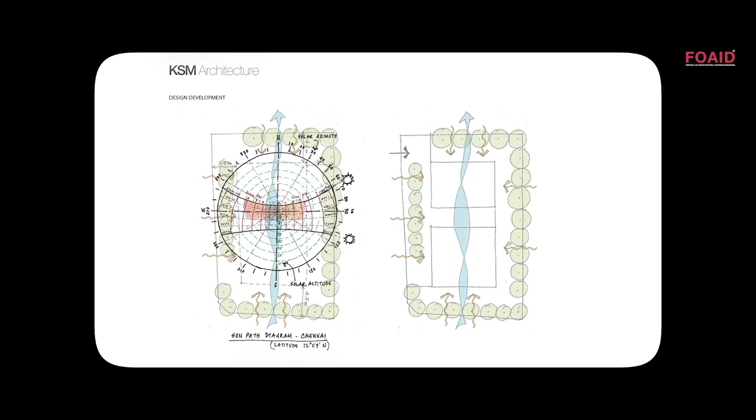And then, now we know broadly what the challenges are. So then we start working on sections, saying, what are we doing with the actual profile? What is the experience going to be like? Because in pursuit of environment, we shouldn't lose out the quality of space, the quality of environment that we're really talking about. So we start working out the section, which is the most important part of any architectural design. I'm sure you'll all agree that plan is there, but section is really where all the fun lies.

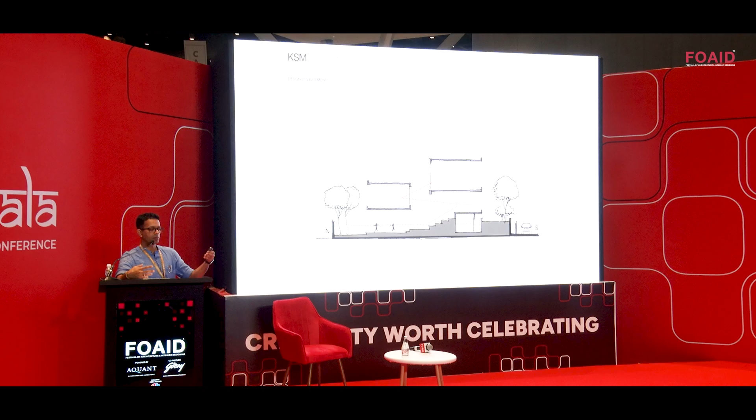So we talk about, are we creating public spaces for students at a lower level? Are we able to stagger the section a little bit? Can we play around with levels? Can we allow that breeze to flow through the space and create an environment where I don't really need air conditioning?

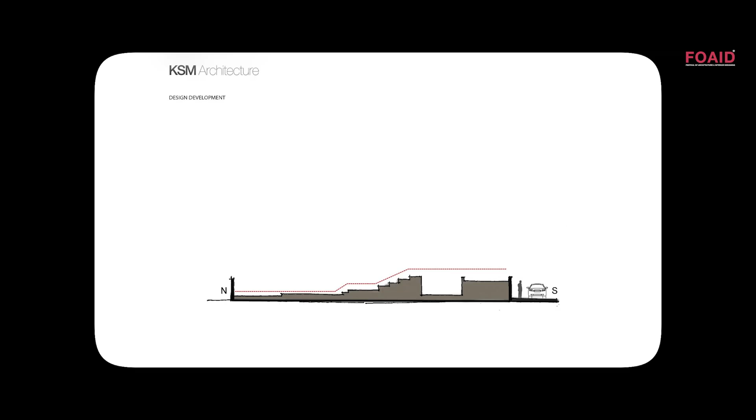I don't really need the, what do you call, artificial lights, sort of like a room like this. It won't work without artificial lights. So you start developing a sensibility saying that, I know my east and west are a little challenged. I know my north and south, I can get a south breeze blowing in. I want to create this really interesting space and volume. I want the breeze to sort of funnel through this space.

So if you start seeing it from a material point of view, this is just a corner of the building. So we start looking at the western wall. Obviously the western wall, everybody knows, is where all that heat sort of builds up from. So it is a composite wall. What you're seeing as a photograph is bamboo shuttered GFRC concrete. We've actually taken real strips of bamboo and used it as a shuttering material and we have created this GFRC panel. It's what we call a ventilated rain screen.

So it is ventilated through and through, and it allows the water to sort of skirt past the back, but it is in many layers. You can see there is a blockwork wall behind, then there is insulation, and then there is another blockwork wall behind. So what are we trying to do really? We are really trying to say that this self-shaded bamboo element on the outside and the multiple layers just behind it are essentially keeping all that heat out and making sure there is no penetration of that western heat into your space, automatically making the ambient indoor temperature much more digestible.

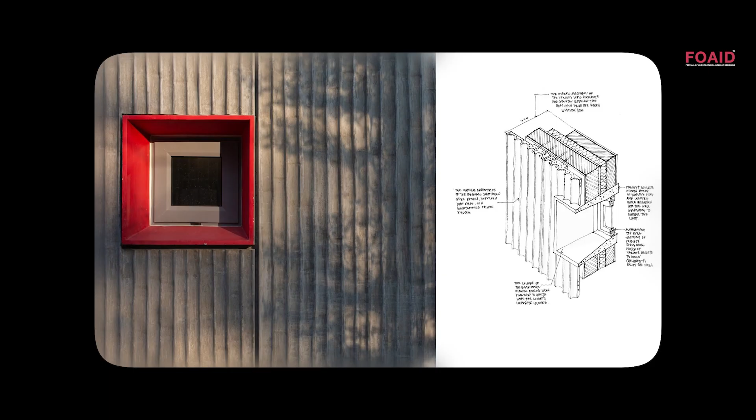Because you'd imagine, like Bombay, we are also very humid. So the second temperature goes up even 1 degree, because of humidity it will start feeling very, very stuffy. So temperature control, humidity control is something that's very important. For humidity control, you need to let the breeze blow through. The second breeze blows across your skin, evaporation happens, you feel very comfortable. Those are all just the basics, like how all of us sitting under a tree feel more comfortable than standing out in the sun.

So the apertures along the western wall are all very, very small. The whole idea is don't bring in too much sun, too much heat, too much light from those openings. But on the north and on the south, because we know those are orientations where the sun is there pretty much throughout the day, we were looking at breaking the sharpness of the sun. What we are really concerned about is glare. If you look at glare, like these lights shining into my face right now, it's uncomfortable because we don't like light in our eyes.

So that is a perceived temperature. For all of us as human bodies, there is absolute temperature and there is perceived temperature. The second you have glare falling on your face, spoiling your view of your laptop or your screen or your paper, it irritates you and therefore you're uncomfortable. So it is not necessarily absolute temperature that we are concerned about. So how do we break the glare? We have these aluminum aerofoil shaped extruded elements as a sun shader to cut off the excess glare on the north and on the south, so that the light quality on the inside is very, very mellow, very, very soft.

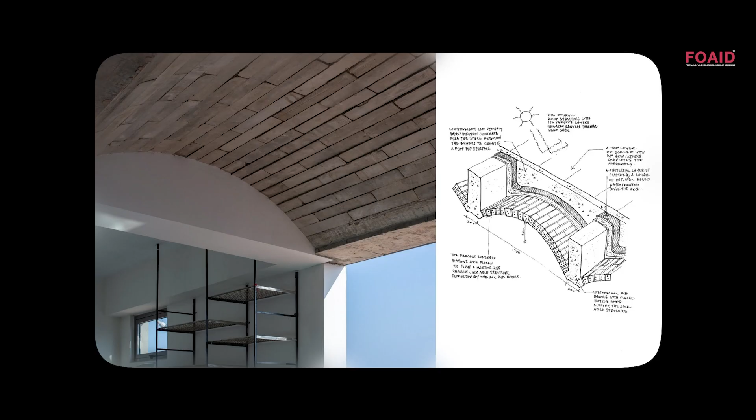And the topmost floor has got a concrete jack arch roof. It's a fairly insulated roof, and it's made out of precast concrete battens. In tropical countries, obviously, we expect a lot of our heat to come from the roof. The sun is overhead at noontime. So how do you insulate the roof? I think that is very important, and this is how we have tackled it for this particular project.

The other project I'm talking about right now is a factory office. So over here, our starting point came about saying, what is the thinking in a factory office? Now, in a factory office, you have to imagine the work thinking is production. They're talking about how many things have to be dispatched, how many materials are coming, and it's a fairly strenuous work environment.

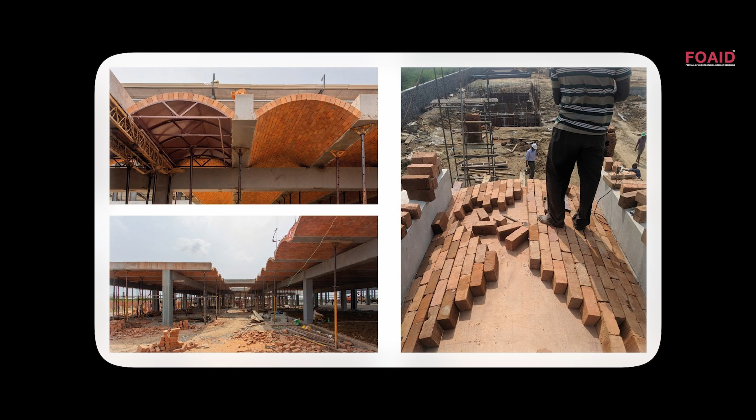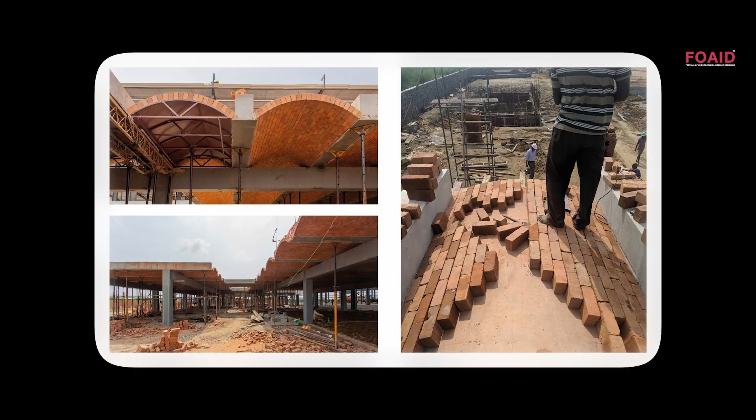So you see, they place a formwork below, and the bricks are arranged on top. So you have to imagine how scary that is. You're placing bricks on top, there's no cement, there's no mortar, there's nothing, and you have to pull that shuttering down. So it takes some real guts to stand over there when you pull that shuttering off, and that whole thing will make one crunching noise and just come down about 1 inch, and it'll hold its place. So basically it stays by pure friction. There is no cement, there is no concrete, there's nothing whatsoever in the installation of what we call a brick jack arch.

So fundamentally, it's an edifice in brick. We have the floors in brick, we have cavity walls in brick, we have large overhangs. So these jack arches also sort of defeat gravity. They hang outside the building line. They create these verandas, well ventilated, keeps the heat out, because you're talking about almost 400 millimeters worth of thickness above the flattest part of your jack arch. So it keeps the heat out, it's well ventilated.

So what else do you want? So you don't have to run the AC 6-8 months in a year, which is quite crazy for a place like Chennai where it is really humid. So really worth coming and seeing. So again, like I told you, it's a story in brick. So it sort of reveals itself as you start walking into the space.

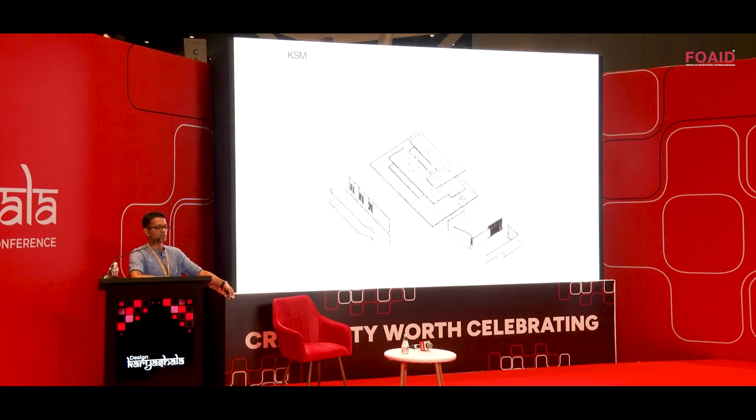So then over here we started saying we'll fix the interiors, we'll fix the program, and then we'll start identifying all our surfaces that we need to really address. So we're talking about south and we're talking about east. So we went to the bamboo curtain on the south side where we can get some privacy, we get a filtered light quality. At the same time, you start getting this kind of dust barrier situation along the south and along the east, which is our wind direction. So the spatial quality is really quite interesting.

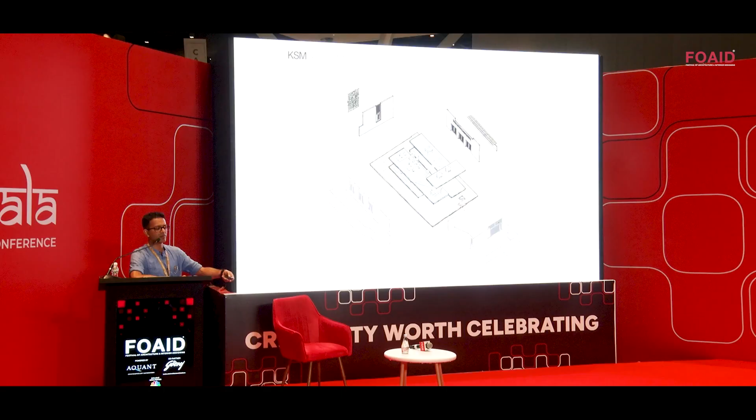Then we talk about west. So west and north, we were more concerned about how we are going to deal with the harsher side. But we eventually chose to go up with a passion flower creeper, an evergreen creeper which loves the sun. So that is just a simple way of saying we can actually cut down the heat on the western side by just growing something which is beautiful, which flowers, which gives you a nice aroma. That is what we have done even along the northern side, where we have a jasmine creeper that provides a sense of shade to those spaces. So none of our windows really need any kind of window covering or protection.

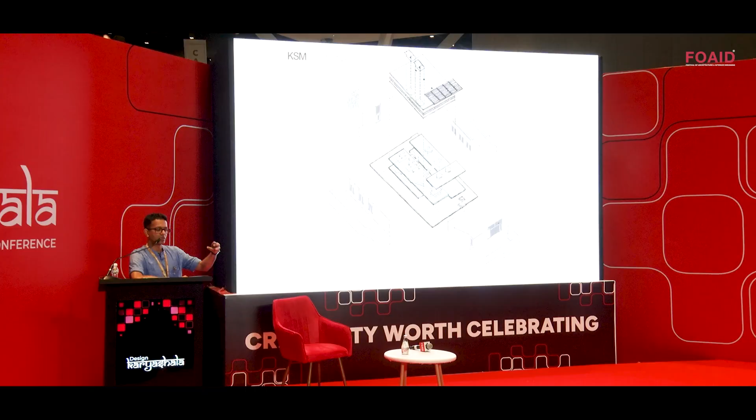Finally, the roof, which is a very technically designed roof, is essentially 450 millimeters thick. It's got a 100 millimeter slab on the bottom, a 100 millimeter slab on top, and 250 millimeters of expanded polystyrene foam inside. It keeps the place extremely cool. You can go even at 3 p.m. and touch the bottom of the slab from inside, and you really don't feel the heat. So it's really down to how you want to manage how your spaces work.

We have wind catchers that allow the cafeteria space to breathe into your lower levels and so on. And that's what you get. So you get a more locally relevant paradigm which fits into the local environment, and at the same time is quite exciting and something that we really like to use and enjoy.